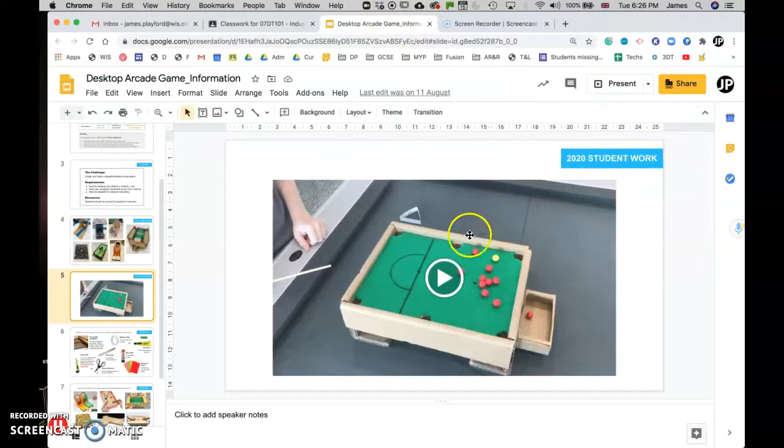This is going to be a very brief video to show you how to make a pool game similar to this in Fusion.

So the first thing we're going to do is a new design. And if we look back at the pool table, we can see the rough construction.

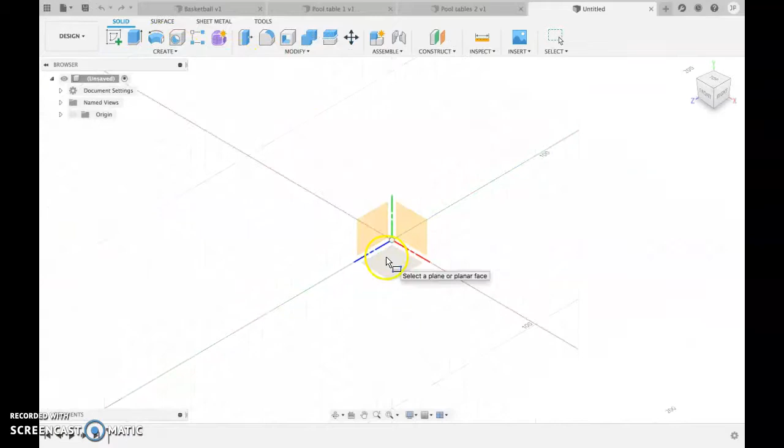So we have a box with a smaller box to the side, legs, recess and some holes in it. So let's start with the main box. I'm going to choose create box, click on this plane, and draw a box that is 150 by 100. Then I'm going to make the height of it 30 in this case, on the top of it.

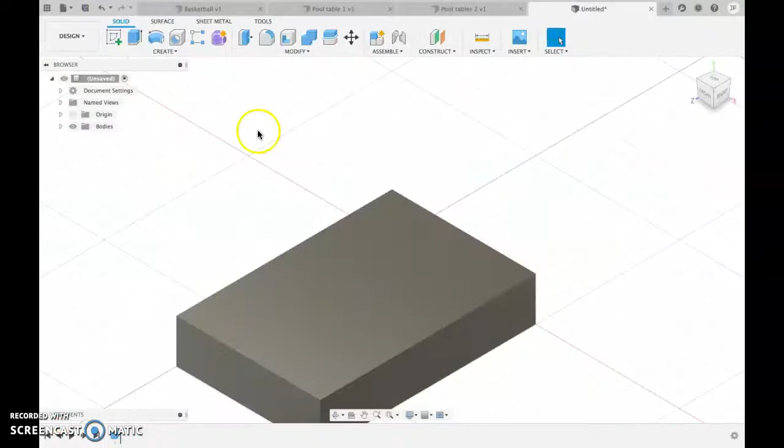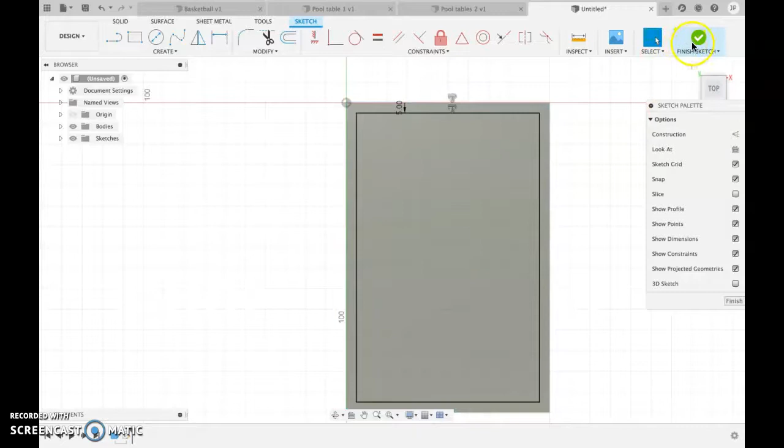So if I just go back and show you what we're looking at, we've now got this upper box and I want to put the recess in for the green area. So now I'm going to do a new sketch on the top. I'm going to click offset, O, either here or O for offset. Click on here and I'm going to pull in by, let's try 5. Sorry, -5. We come in like that and finish that sketch.

I'm going to click E for extrude, click on this top part, and pull down by, let's go down by 5, see how that looks. Yep, 5 looks fairly reasonable. So we've just created this recess here.

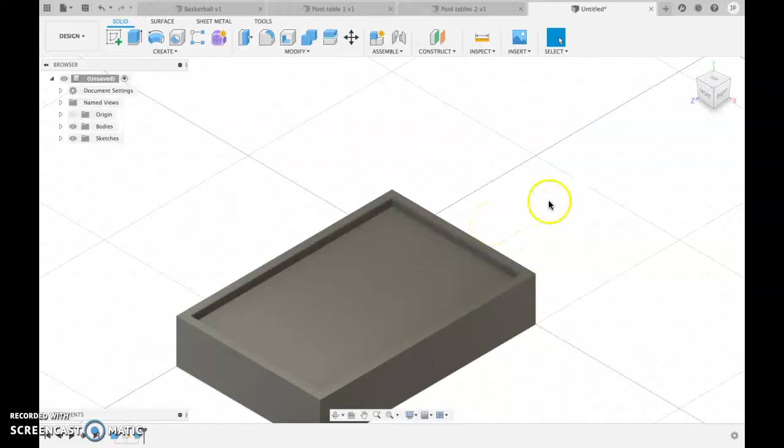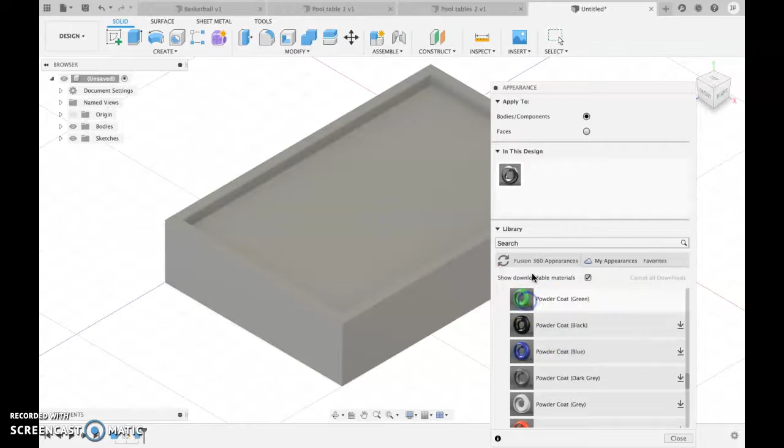I'm just going to colorize that green, so I'm going to click A for appearance. It's got a little bit of lag going on here, I'll try that again. A for appearance, yes there we are. And I'm going to choose green paint, which is down here. If you get this little symbol, it means you need to download it, so I'm just going to get green paint. And I don't want it to go to the whole body, just to the faces, so I'm going to put green paint there. And we can see we're starting to get somewhere, looking a little bit like that.

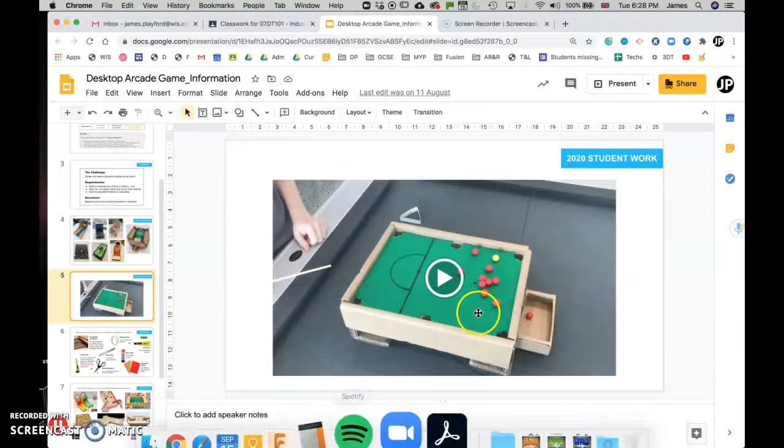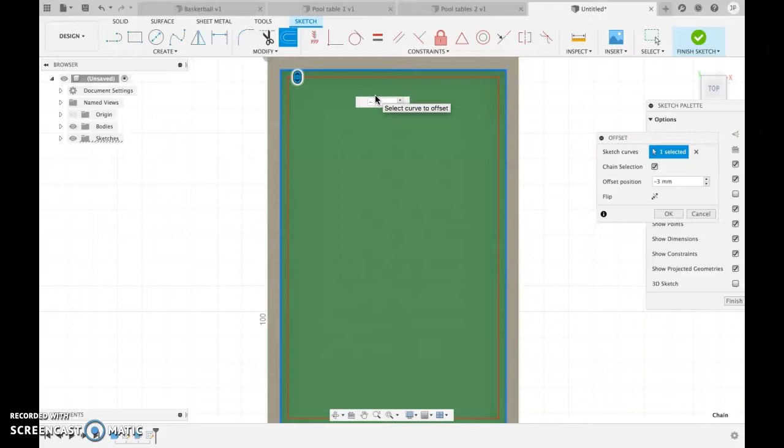So next I want to put these holes in it. To work on this surface, I start a new sketch on this top surface. Again, I want to put an offset in and we'll see why in a moment. So click here for offset, come in by -3. The reason for that is I want to put holes in the corner points. In fact, I'm going to make it slightly bigger, I'm going to put in -5 to make the holes a little bit bigger.

Now that I've done that, I'm going to get a circle, go right to that corner, come out, and make that 10. Then I'll put another one here, another circle, 10. C for circle, 10. C for circle, 10.

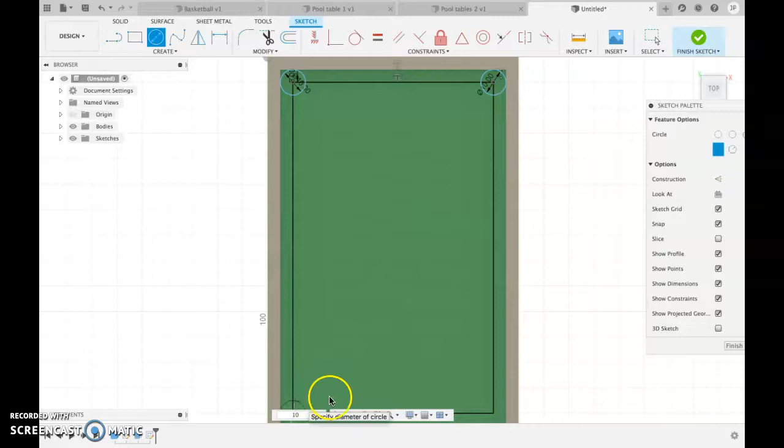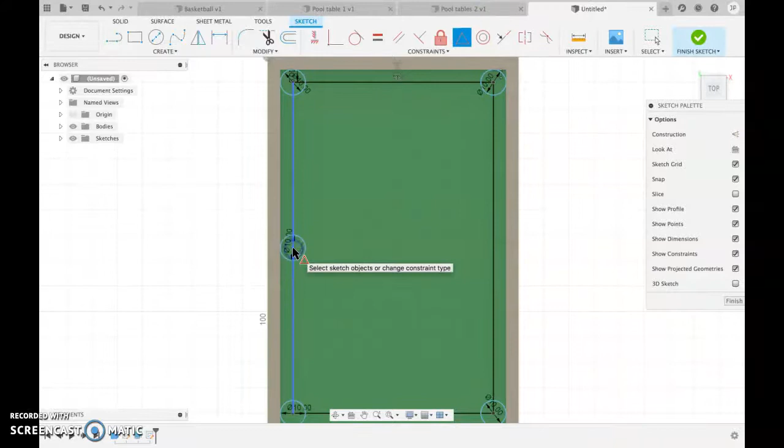Now I'm going to teach you another tool, so we'll do C for circle again, 10. But I want this circle to be right in the middle, so I can use the midpoint, in the middle of this line, and it moves it to the middle. How good is that? So C for circle, here, 10, midpoint, and that's going to put that in the midpoint for me.

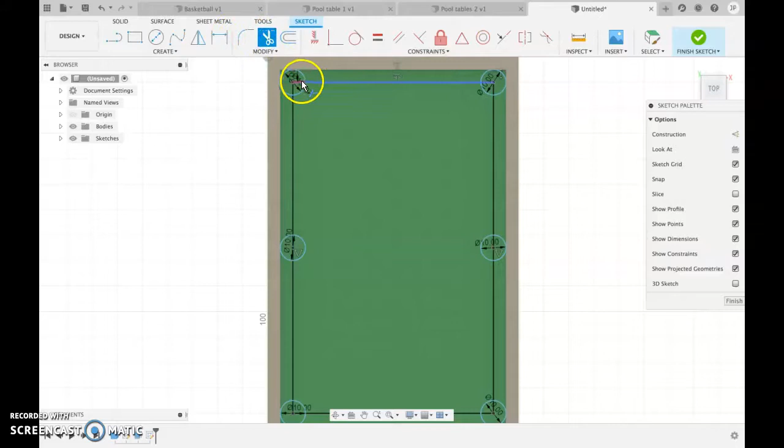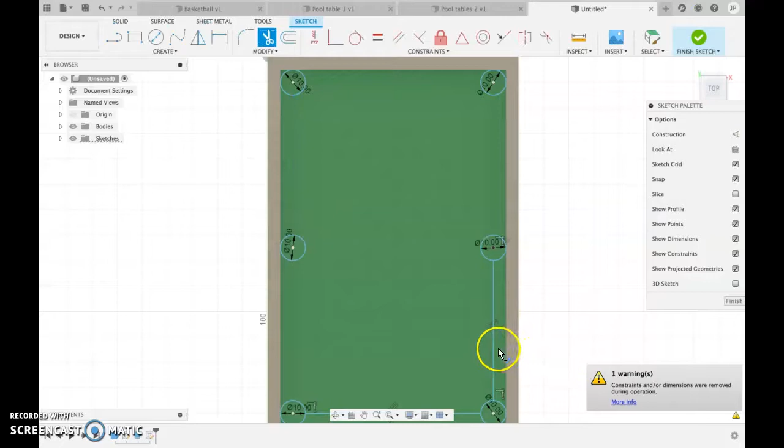How beautiful is that? Now, just to make my life easier, I'm going to get the trim tool and just cut out these bits that I don't want, so I'm just left with a circle. The reason I'm getting rid of them is it's just going to make some selection easier in a second. Let's get rid of that, that last two there and there, beautiful. Finish sketch. Now I need to select the areas that I'd like, so I click E for extrude, and I select the circles that I'd like to extrude.

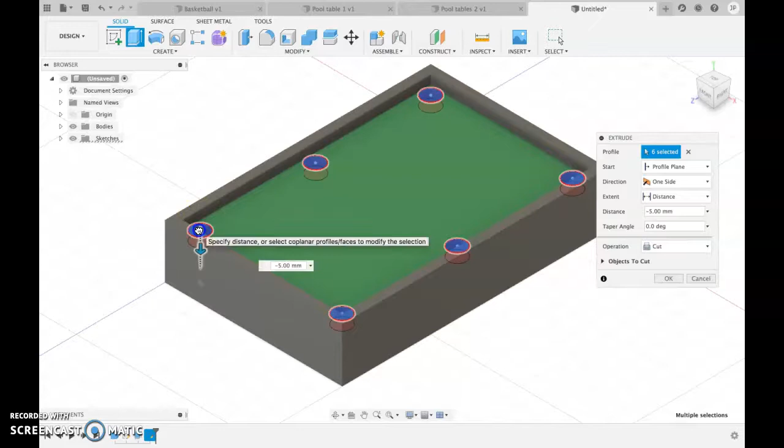And I need to bring them down, so let's bring them down by 5. It's a cut. Now I've got my holes in the pool table. So what's left to do?

Just need to put these legs on now, and the box. So let's start with the box, shall we?

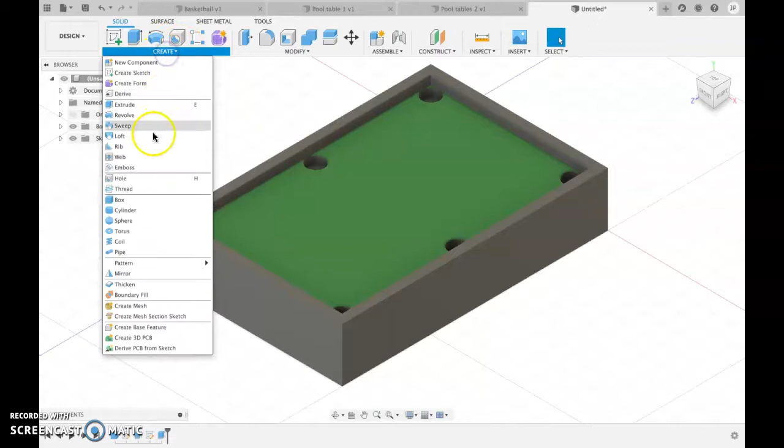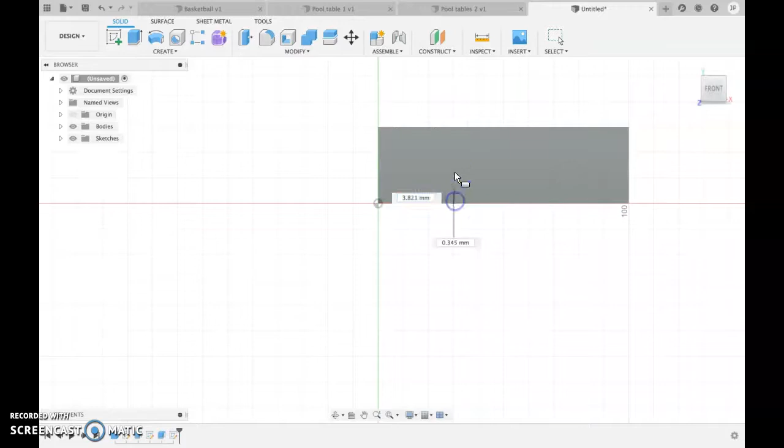So we want a box at the end there. So we create box, this surface here. I'm actually going to click front so I can really see what I'm doing. Let's come in 3 from the side, create box, 3 from there, draw up, and 3 from the edge, so 1, 2, 3, there's the box.

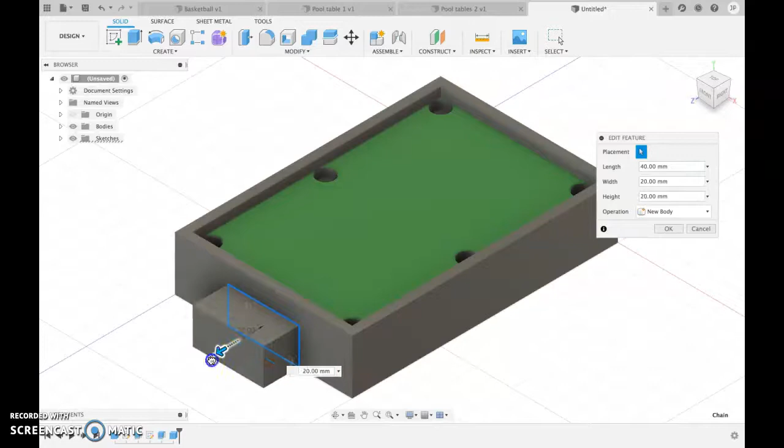I don't want it to join, I want it to be a new body. You'll see why in a second. Pop that out there. It didn't actually come out far enough, but that's fine. I can come down and click edit feature, and let's bring that out. 15, 20 is better. 20 is good. Now I click the top surface, click shell, and let's make that 3. And I've now got that box at the end there.

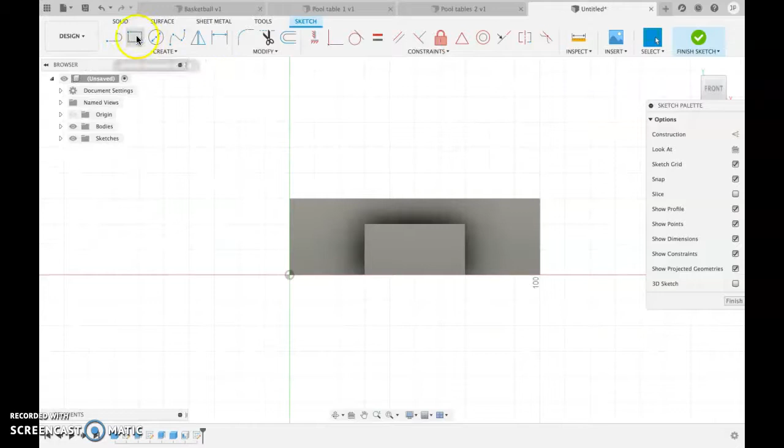What I can also do, just to get a little bit more of a feature, I can click up here, create sketch, click inside there. I can then draw on here, and make that a regular size, so let's make that 10 by 20. I'm just tabbing to move between the two. So I've got a sketch there.

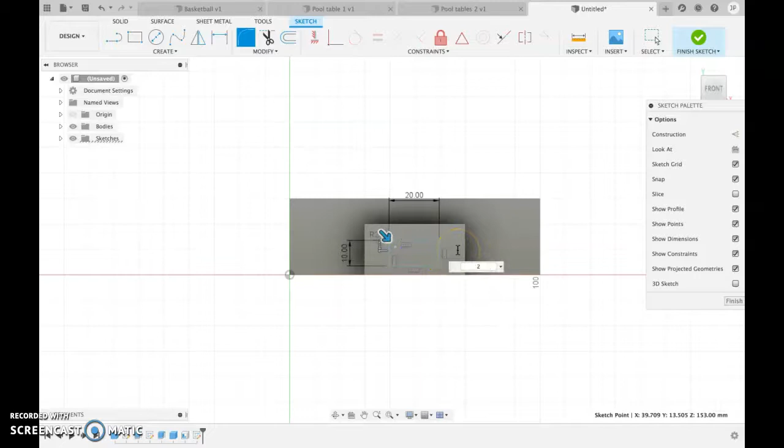If I want, I can even round these edges. I'll just show you another little feature. So I'll just radius that edge by 2. Radius this edge by 2, this edge by 2, this edge by 2. So I've got these nice radiused edges.

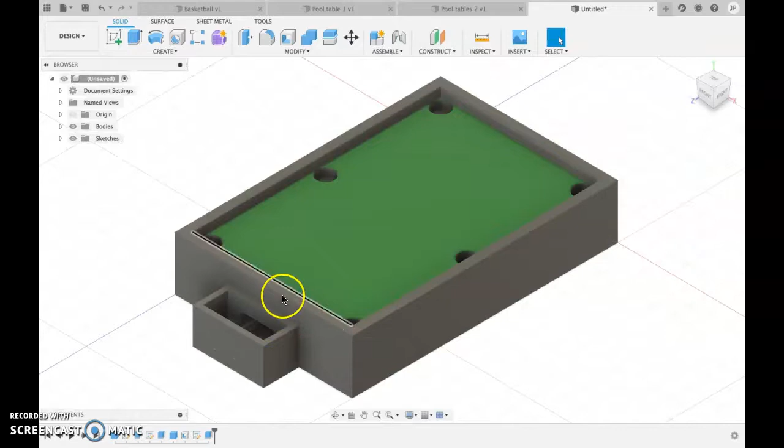Finish sketch. E for extrude. Get this area. Cut in. I've now got a hole for my balls to come out of here. So now we just need to make the feet.

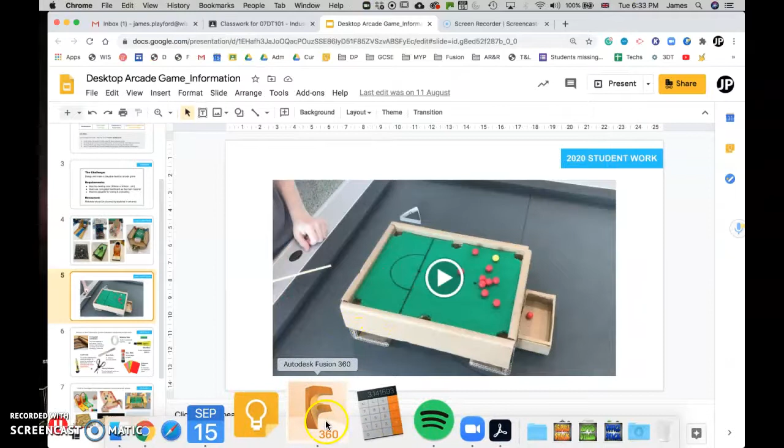These here. So these should be relatively easy. There's numerous ways you can do it, so I'm just going to choose one that seems easy enough to me. So new sketch on this side. So I want the feet to come down here. So initially I'm just going to draw a box. That looks about right, that looks pretty good.

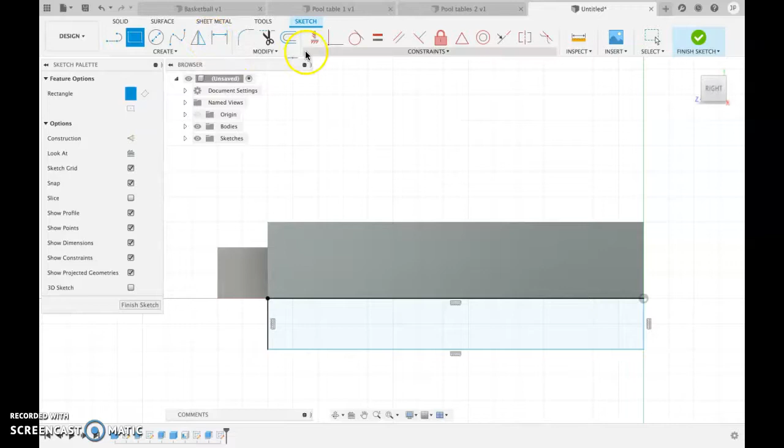I'm then going to use the offset tool again. Click on the edge of the box. Come up 3 millimeters. Okay, and we need to have a gap in the middle because there are 2 different feet. So I need this gap.

So I'm just going to draw the gap. This is the middle point, so I'm going to do a center rectangle. Center diameter rectangle. I'm just going to come from here and pull out. The exact size doesn't matter, but that's going to be now equal along the length.

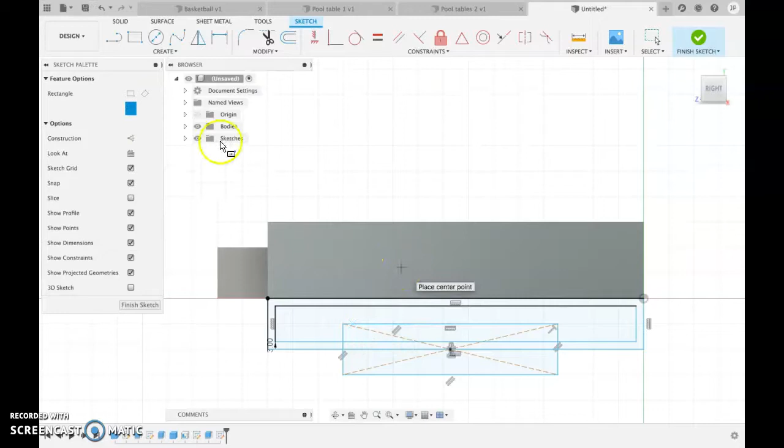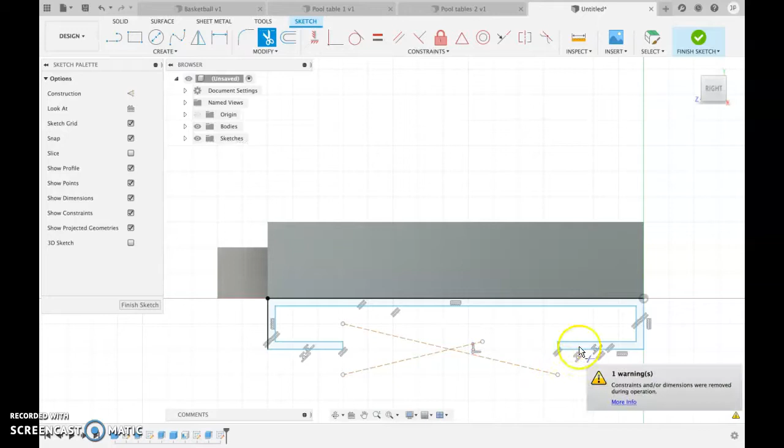Okay, so now I've got a bit too much going on. I get my modify tool and I just trim out the bits I don't want. You can see how using the second rectangle has allowed me just to nicely clean up. I'm going to cut these bits away that I don't want. That's on there. Beautiful. Finish sketch.

So now E for extrude again. Get this, and I just need to pull that out to that same thickness. Just set lines up there, and I'm having it join this time. And there's my pool table. That's pretty good, isn't it?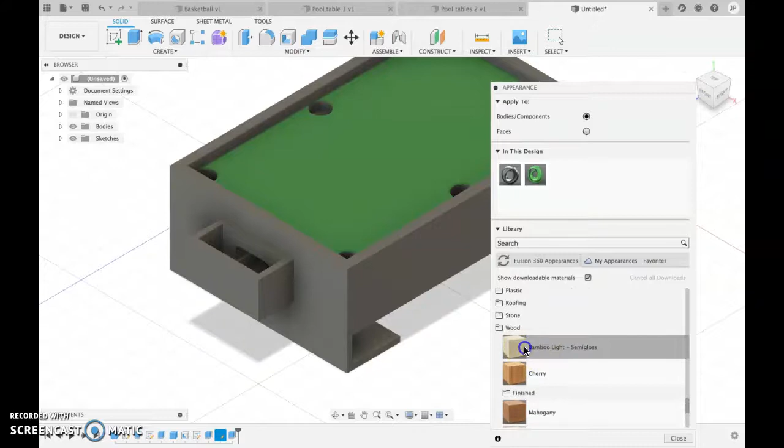If I do A for appearance again, I can choose a material to put on it. So it's not going to be made from wood, it's going to be made from card, but we can get pretty close to that if we find maybe bamboo. And because I'm applying it to the whole body, it's going to temporarily remove the green. But then if I do faces, I can just put the green back on there.

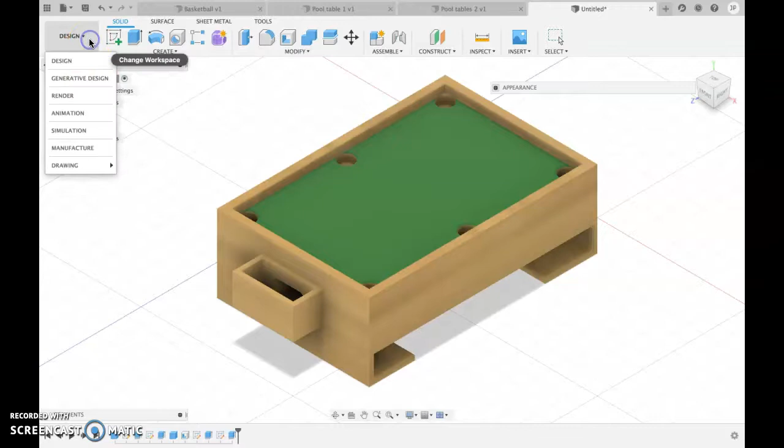We can close this out. We can fit. And that's looking pretty good. We could even come here to render, and put that in the render environment. And that's looking pretty good, that, isn't it? So that's how to very easily draw a card pool table in Fusion 360.